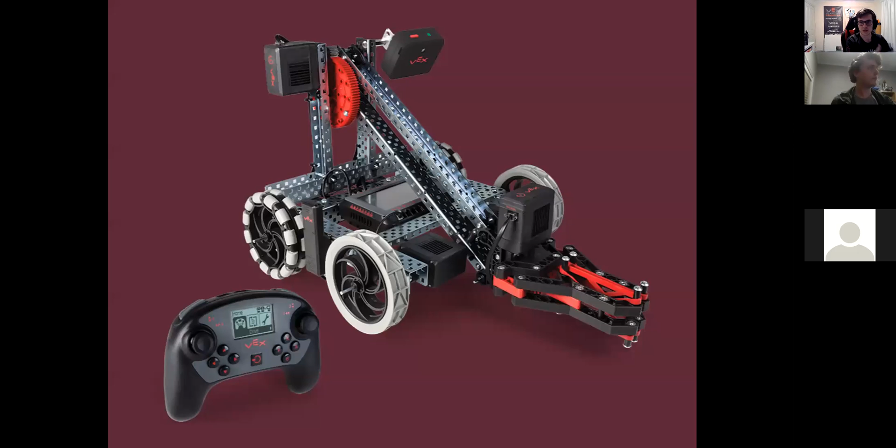So for parts, mechanical systems, and applications, we're going to talk about the Vex system and Clawbots and how we use the Kaizen model. More specifically, it's a model myself and Anthony use, which is all about continual improvement and getting from robots that look like this, that aren't particularly great, into more advanced robots that you would see at Worlds, on the world stage in the Dome.

So I guess we just want to start off with the Vex website. There's the Vex store, and there's a lot of different parts available on the store, a huge range of equipment you can buy. So over the next few slides, we've condensed some of the parts that we think are the most important and that you will see the most, and also a few unique applications, with a small discussion on each of these part categories to go over what they can be used for.

And then later on, we're going to talk about how these are all used together to make mechanical systems, like different drivetrains, different shooting mechanisms, intakes, and various other things that you will use in the competition.

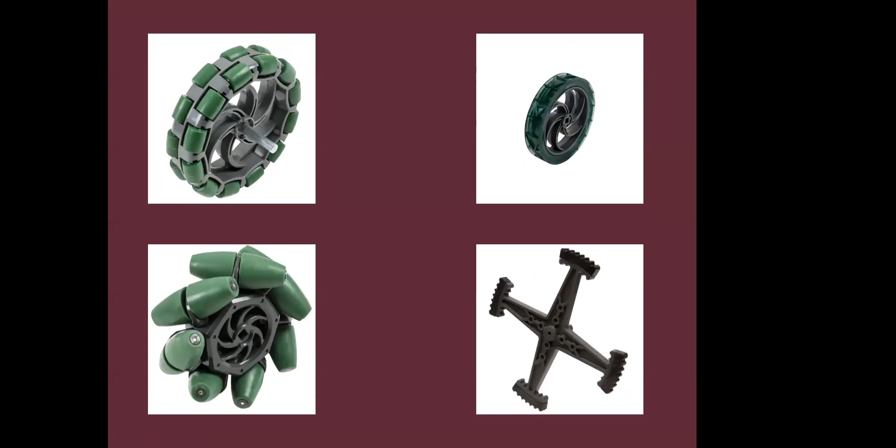Okay, so in the store, the first section of parts we're going to go over are the wheels. Vex offers a huge range of wheels in different sizes, typically 4-inch, 3.25-inch, and 2.75-inch. I'll hand it off to Jacob and Anthony to talk about how these wheels might be used.

I'll take the Omni wheels first. Generally every team should be using Omni wheels purely because of the low coefficient of friction. Just a clarification for anyone who doesn't know, Omni wheels are the top left one, the one with the miniature rollers. The main reason people would use this more is that because they roll side to side, they allow for very sharp turns compared to a normal traction wheel on the top right.

Think about how a tank can run both sides of its drive sideways and turn around, but your car cannot turn on the spot at all. It's sort of like reducing the friction sideways, because the wheels have to drag sideways as you turn on the spot, so the rollers can roll and it can turn better. Think of it like a robot that can rotate on its center axis, instead of one that can only turn at a 90-degree angle from its rear to its front.

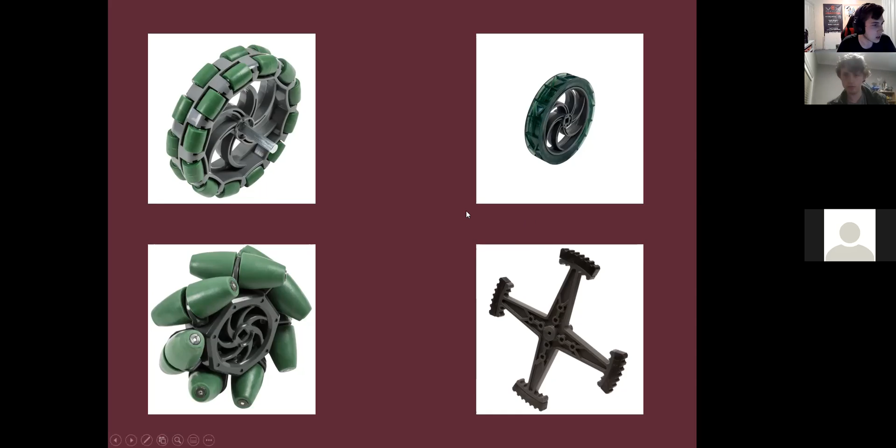Because it's kind of very top heavy, sometimes the robot would tip over and fall backwards. When falling backwards, it would land on these wheels so that even though the robot had fallen and might not be able to use its lift, it could still drive and act as a push bot. If you imagine it's tipped over, the front two wheels are at the top still spinning, but it's using the rollers from those wheels, so it's still able to drive around. That's a cool little tip. It'd be amazing to see that at competition - it's just a useful little competitive application.

An alternative to that is designing your robot to not tip over. That would also just get good, really.

And then we've got linear slides here. These are used for various different things. Generally, many teams wouldn't use this, rather opting to make their own. But the main purpose for this, predominantly in one season of VEX Robotics, was in Turning Point, where they used these components just to make a puncher, and that's really what it was. That's something we'll go into more depth with a bit later.

The reason a lot of teams don't use the VEX linear slides is they just have quite high friction in them. The old ones were steel on steel, and the new ones are plastic on steel, but it's just not designed the best. When you make your own custom ones, you'd probably use rollers to reduce friction, whereas this is just straight sliding on sliding action.

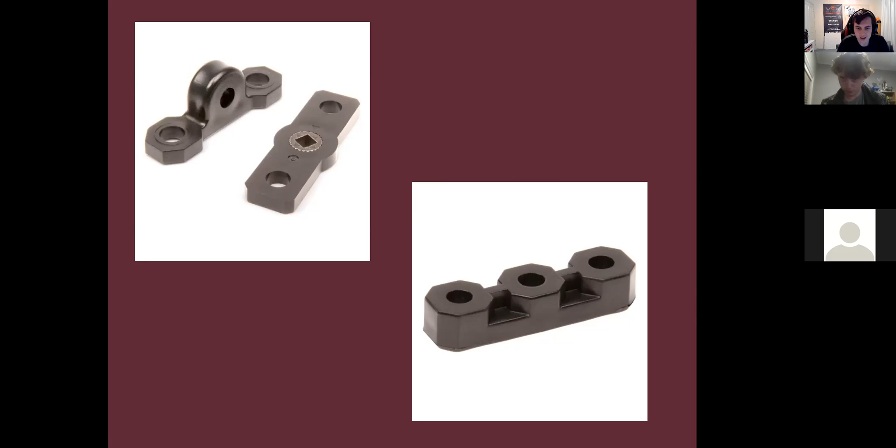Tank treads and sprockets, a quick jump into those. In VEX we have two types of sprockets, and we're not going to go over standard sprockets here, but they come in two sizes: standard sprockets and high strength sprockets. Standard sprockets have such small chain that it snaps way too easily, so no one in a competitive environment considers it. What you see here is high strength sprockets and high strength chain. You can interchange the chain with tank treads to make tank drives or conveyor belts or whatever.

There are multiple types of tank treads. On the top left, you've got ones you can slide padded mats or flaps into, which allow you to make flap-style intakes and whatnot. Or you can use green links, often used between padded links, like the one below the top left one, for tank drives. You don't see a lot of tank drives because the risk of them snapping is a big problem.

Was there anything else I was supposed to go over here? When you're using sprockets, you should use the largest sprocket you can fit without sacrificing other parts of your design, because you want to keep the wrap angle around it as large as possible to reduce strain. Using the small 6-tooth sprockets at the bottom right, you put a lot of strain on the chain if you try to power it via that, and it will likely snap.

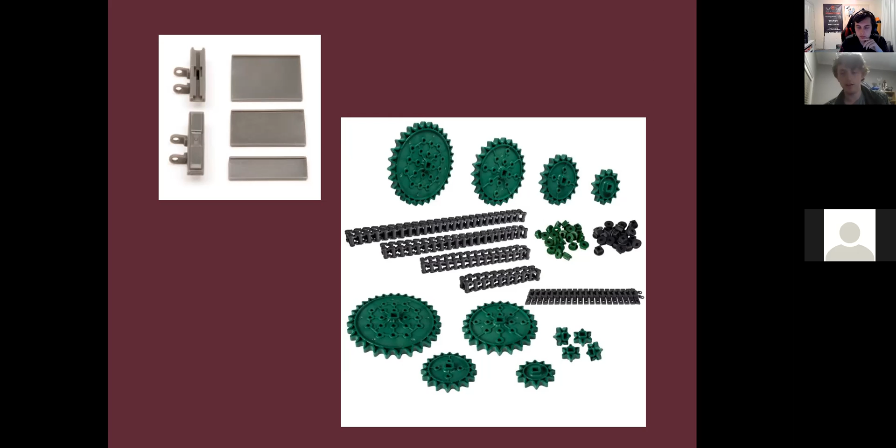All right, next thing we've got is just gears. Gears come in both low strength and high strength varieties. Typically the high strength ones are used much more—it's in the name that they've got more strength. Did you guys want to quickly go over gears?

A good rule of thumb: if you notice, there are very thin gears, and on the other side there are much thicker gears. You would generally want to use these thicker gears on more strenuous portions of your robot, like the drive or any lifting mechanisms. For the thinner gears, you'd want to use them for low friction purposes, like a flywheel or intakes—other low strength applications. The low strength ones are fine in a lot of applications.

The issue you see with them is Vex designs them with lines cut into them that work as fracture stress concentrators, so it's a lot easier to snap through those. You can snap teeth off in some situations, but with low strength gears, I've personally snapped the inside of the gear more than the teeth. I have snapped teeth off of high strength gears in very high stress situations, such as on a catapult that's having high impact repeatedly.

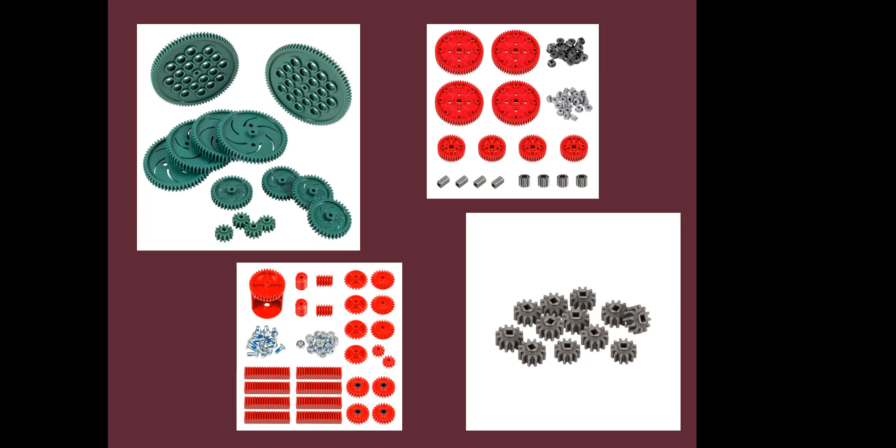But generally, as long as you ensure you're not overloading the gears and not doing repeated impact loading, they should be fine. If your drive reverses a lot - you're driving forward and suddenly want to go backwards without letting it roll to a stop - that's a high hammer load on the gears, which is why low strength gears sometimes won't handle a drive as well, especially with more motors.

Like that robot I've snapped the most on had 8 of the old motors, which is probably close to the force of a 6-motor drive. They say theoretically that should be a 4-motor drive on V5, but I think the loading was more like a 6-motor drive running through those gears. So if you use them in a drive, it's probably best to have high strength on the wheels themselves, where the most load will be running through.

And just to add onto what these guys have said, another cool application for the gears is that you don't necessarily just use them as gears. You can use them as gear ratios to change the torque or speed of different outputs. For instance, we had a gear ratio on our flywheel a couple years ago, which increased the speed of the flywheel using the gear ratio, right Anthony? Yeah, it was a 1:5 ratio and the input was a 600 RPM cartridge.

Yeah, so there's also ways you can increase the torque. Like if you want to climb onto a platform, you can use the gear ratio to increase the amount of torque you have in the wheels rather than the speed. So there's a lot of ways you can use gears to change the output of motors and also affect how motion works with the robot. Overall, they're really important.

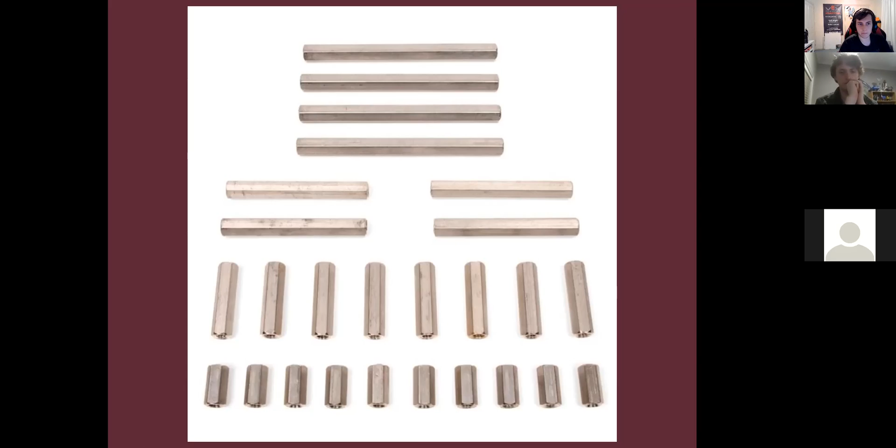Next up, we've got the Winch Pulley Kit, which isn't used that often by a lot of teams. I'd say, Jacob, have you ever used a Winch Pulley Kit? I don't even think we have one. Yeah, we have custom winches every time we want a winch.

People don't usually use winches and pulleys. They might buy the kit to use the pulleys for tensioning, for instance, which is what we did. Another application for these was that those pulleys were also good to use as rollers, to roll against the surface of the walls, as using other methods would have been too bulky or too small. So this was a nice in-between method for rolling against the surface.

I'm pretty sure we had them on the corners of our robots so that when it would bump in, it would kind of just self-center. Do you have anything to add, Jacob, or is that it?

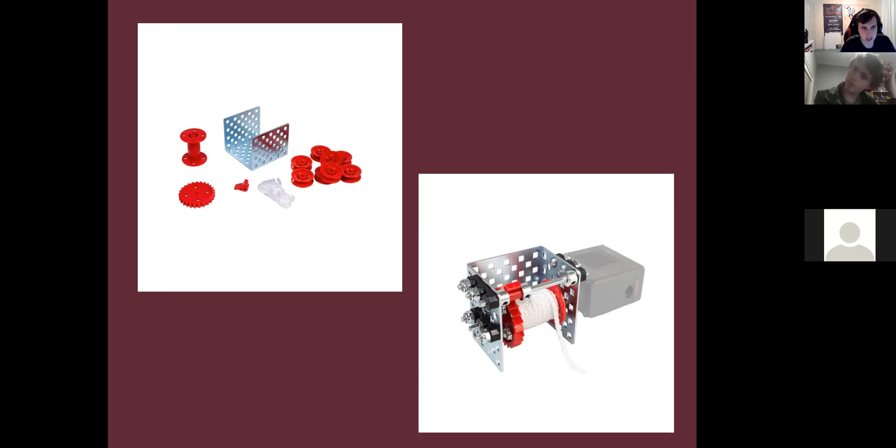Next up, we've got pneumatics, which teams have kind of overlooked the last few years with V5, because there used to be a restraint where you could only use your 8 V5 motors and couldn't use any pneumatics. But now they've changed it — you could sacrifice 2 motors to have pneumatics, which pretty much every team felt wasn't worth doing because the V5 motors are much better and could achieve what the pneumatics do. But now we have 8 motors plus pneumatics, so you don't have to sacrifice them anymore. So it's like if you had an additional function you wanted to do but didn't have enough motors for it, that's something you could use the pneumatics for.

One example of something we did was during Turning Point, back when we had V4, I think we could afford to do it then. What we did was we had the pneumatics at the bottom of our robot, with 2 cylinders, so that when we'd go on the platform to park, we'd activate the pneumatics and they'd push down these little paddings, which would lift the robot up a bit. It had anti-slip mat, so since we had Omni wheels, when teams would try to push us off the platform, we'd be stuck to it, giving us more traction and making it harder for teams to push us. So there's little applications like that you can use them for.

What are some more? If you don't know what pneumatics are, they're air-powered pistons, so just linear movement. You pump up a tank with a bike pump and can fire it however many times you want in a match until it runs out of air. There are different pneumatic kits as well — single acting, double acting — so there's a huge range of different ones you can use, and it's really fun to play around with.

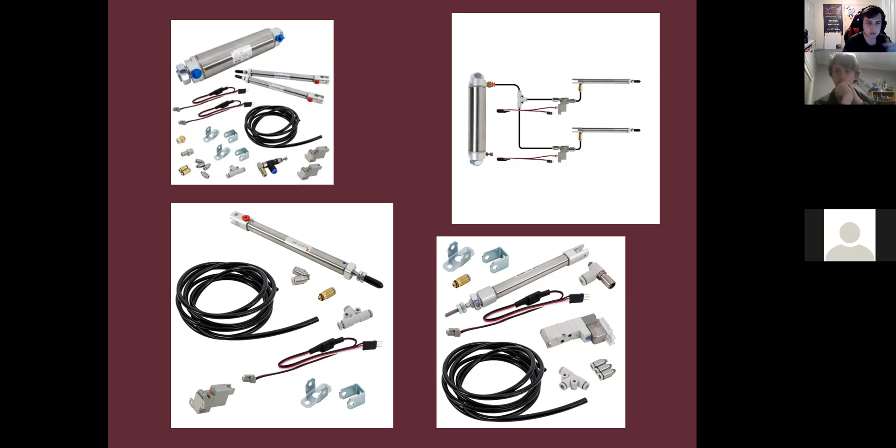do with it. But these are kind of the parts we'd say are really important to use, and also just to get you thinking about different applications you might have for using these. And also so that when we now show you the systems we're going to get into, you guys have an understanding of what these are.

So we've got a couple of videos today. Only one of them is a bit of an explanation video. And yeah, so we're starting off with our drive systems. So we're going to talk about drivetrains. We have this quick, I think it's a 3-minute video. It just goes over all the different drive systems. I feel like it'll probably explain it better than we will. But then we're going to do our own little explanation afterwards and go into a bit more detail. So I hope you guys enjoy this video.

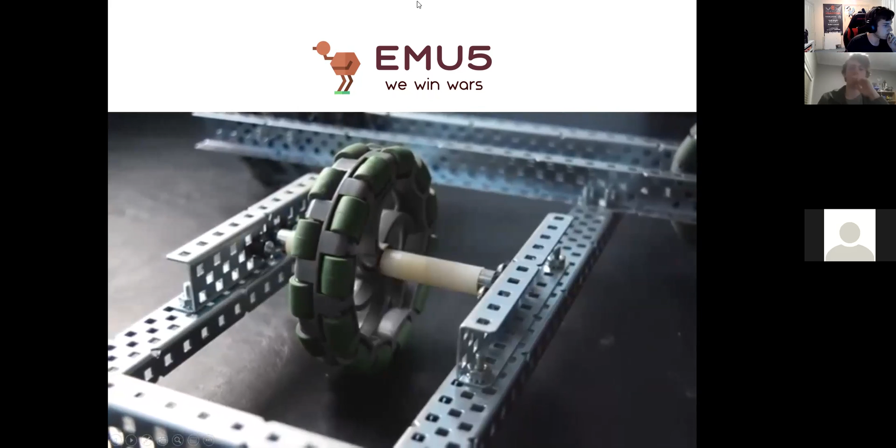So yeah. Vex Robotics has a number of different wheel types, but what's the big deal with Omni wheels? What advantages do they give you?

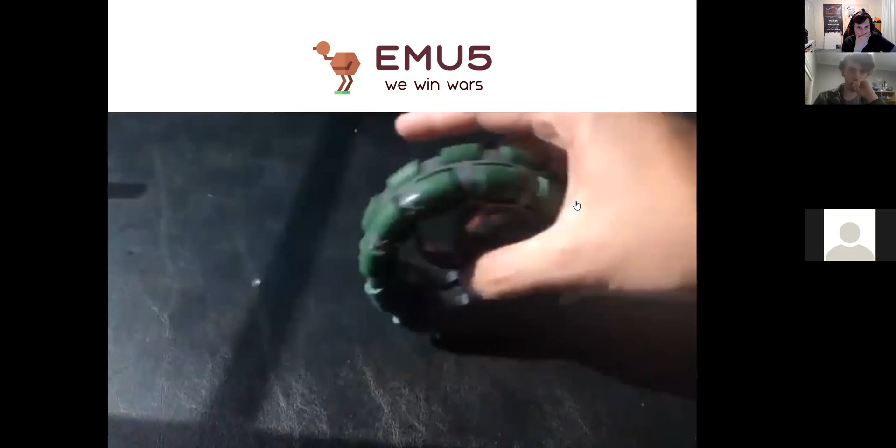Omni wheels have rollers all along the circumference, which allows them to not only roll like a normal wheel, but also move sideways, allowing you to do some cool things. The most common type of Omni wheel configuration is the tank drive. This configuration is your standard 4-wheel setup, which can move back and forth and also be pushed from the side. This can be a disadvantage, but it allows the wheels to pivot more effectively, putting less strain on the motors. This was a big deal back in the Cortex days, but with V5 motors it probably isn't that big of

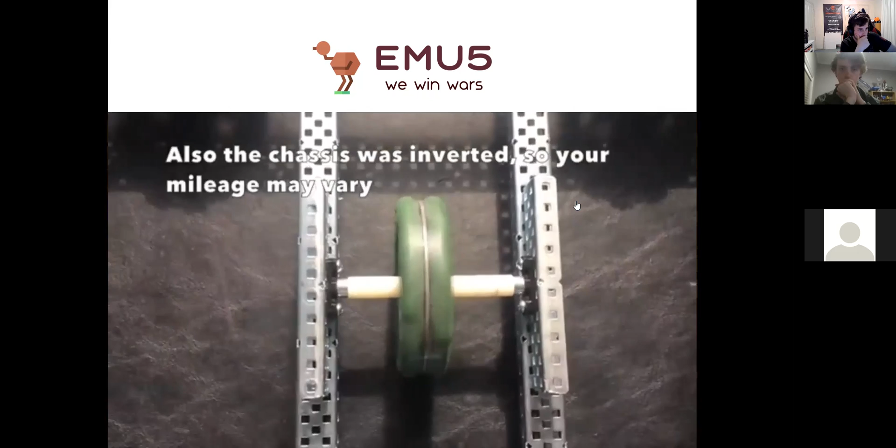a deal. One thing that takes up another motor but could potentially be a worthwhile addition is a 5th wheel in the horizontal direction. This can help you strafe sideways, allowing you to line up shots and shoot with more precision. You may have to create some sort of system that keeps the wheel in contact with the ground, because this wheel sometimes worked but wasn't in contact with the ground as much as it should have been, which means that if there was a lot of weight on the robot it probably wouldn't work at all. This setup takes some effort but could potentially yield some neat advantages.

One other tank drive configuration is the hybrid setup. This setup involves swapping one pair of Omni wheels for normal wheels, therefore getting the decreased strain on the motors because one set can slide effortlessly across the floor, and you are much more protected against pushing compared to the full Omni wheel setup. This setup has perhaps the best pro to con ratio, with the only main con being that you can't use a middle wheel to strafe, but that's a small price to pay for not being pushed

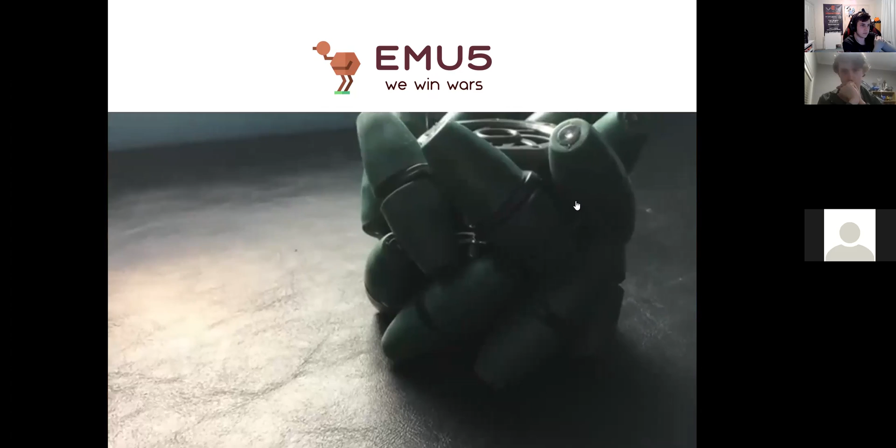around. For the next wheel type, we'll be moving on to Mecanum wheels, which simply look awesome. They feature angled rollers and come in 2 counter-rotational flavors. Mecanum wheels are used on industrial machines such as forklifts because they allow you to strafe sideways, keeping your front end pointed towards the target, which allows you to line yourself up with more precision than a standard tank drive.

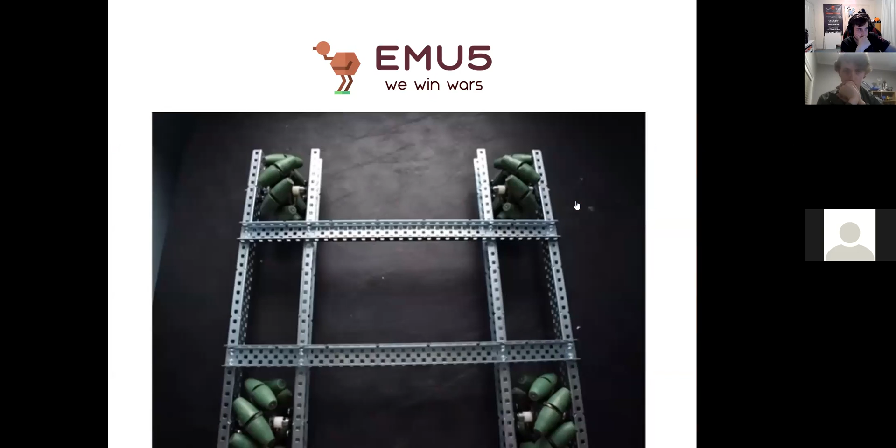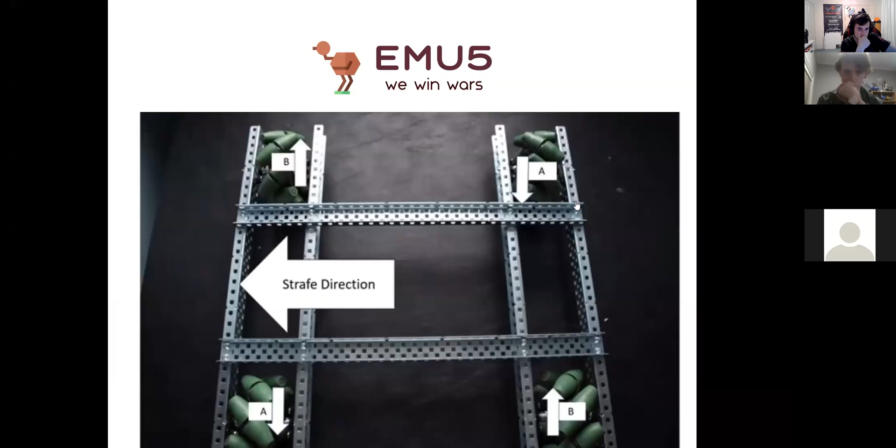With Mecanum wheels, you want to set each pair at opposite corners so that your front 2 wheels are either pointing towards or away from each other, and the opposite for the back wheels. Let's call these 2 wheels the A wheels and these 2 wheels the B wheels. When you turn the A wheels forward and the B wheels in reverse, you strafe to the right. When you turn the A wheels in reverse and the B wheels forward, you strafe to the left. You can still drive forward and backward like a normal tank drive, along with turning in place.

But disadvantages? Not a lot. From what I could find, the main disadvantages are that they have less traction because they're giving up surface area for the rollers. Mecanum wheels also typically weigh more than traditional or Omni wheels due to the increased width. Mecanum wheels are pretty cool and fun, they just require a couple of minor trade-offs.

Finally, we come to the lord of all Omni wheel setups, the holonomic drive, commonly referred to as the X drive. This setup features 4 Omni wheels arranged at right angles to each other. The example shown here is nowhere close to the size restrictions of VRC and isn't a particularly secure example, but was mocked up rather quickly to show the range of motion for one of these setups.

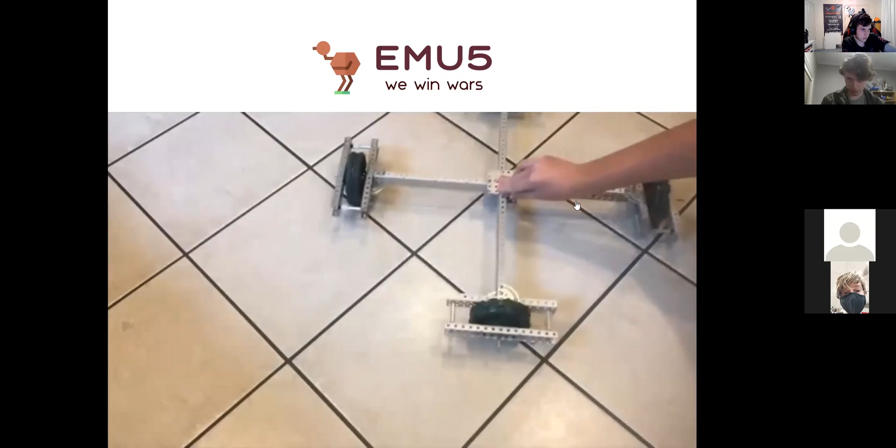This drive setup is really cool because it allows for 8 directional movement, allowing movement in the 4 main directions along with the diagonals. If we name each wheel A, B, C, and D, we can go through and dissect how to make this system drive in all 8 directions. If we move wheels A and B toward the middle, and wheels C and D toward the outside, we move forward. If we extrapolate this to the other 3 main directions, we can see how to drive each set of wheels. Feel free to pause the video to see in more detail.

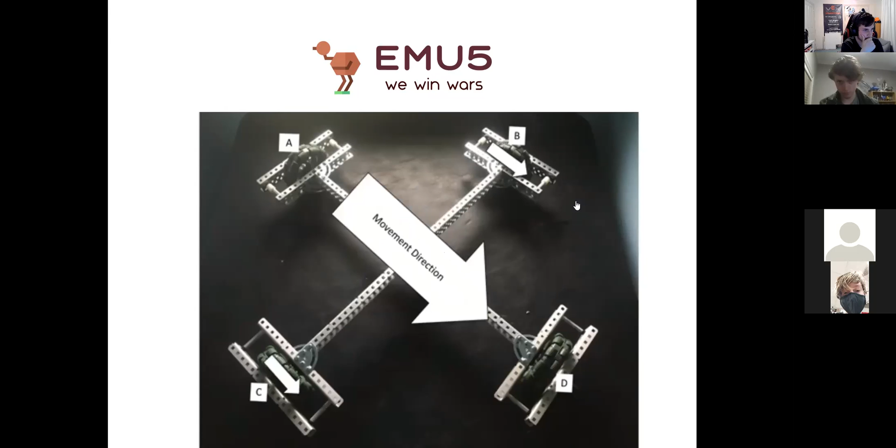If we want to move diagonally right forwards, we move wheels A and D in that direction. If we move them in reverse, we move diagonally left backwards. Moving wheels B and C forward, we move diagonally left forwards, and by reversing B and C, we move diagonally right backwards. And you can turn in a circle by moving all the wheels in the same direction.

You might be saying, well, if it's so good, then why doesn't everyone do it? Well, from what I could find, the main downsides are less pushing power and less traction, which means that for some years, like In the Zone, where pushing mobile goals was a major part of the game, this would be a pretty big disadvantage, but in shooting and stacking games, Turning Point, this drivetrain could be a huge point in your favor. Climbing over objects isn't the best, especially with the outer wheel guards, but if you could sacrifice those, I think that climbing might not be that big of a deal, especially if your drive is geared for torque.

There's also a 3-wheeled holonomic drive, which is outlined in the excellent book RioBotz Combat Robot Tutorial, where it outlines 3 wheels set at 120 degrees from each other. However, this is difficult to make in Vex, seeing as there aren't gussets with that angle, and I wasn't sure how useful this knowledge would be in the Vex competition world.

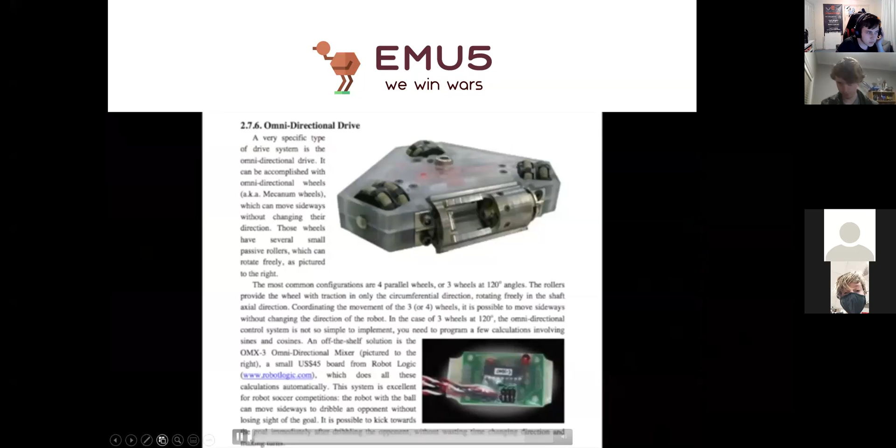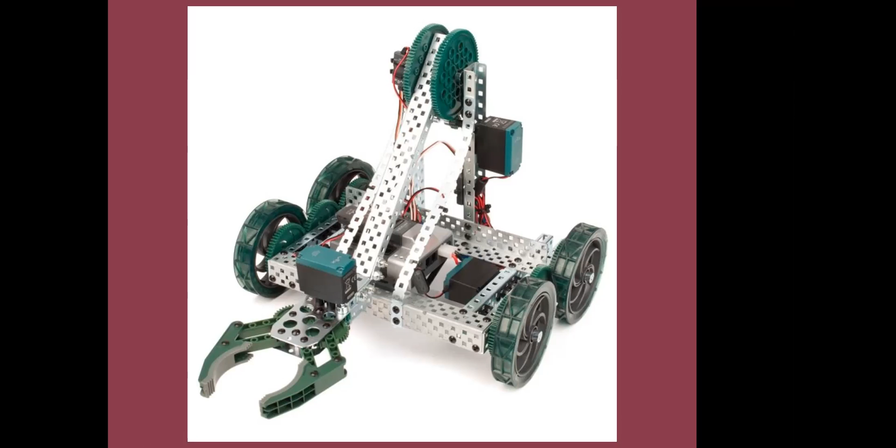The axle will want to bend further and faster, which will damage your axle and cause the wheel to not be sitting straight. Whereas if you support it on both sides, you're reducing the distance. You're giving it more support. It's less likely to bend. Additionally, if you're bending your axle on the outside, it will likely bend the axle on the other side a bit easier, and your gear might become disconnected from other gears it's linked to and skip a fair bit because of the bent axle.

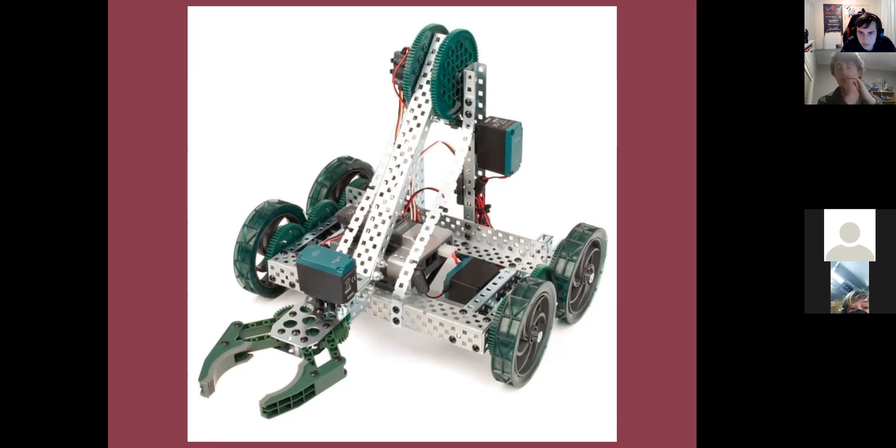Yeah. Okay. And then next up, we've got Mecanum. Now, Mecanum, in my opinion, back when I first started, when I was in year 8 and year 9, I was like, oh, look at it, Mecanum drive, that's so cool. You can do holonomic without an extra motor like an H drive, and we didn't have to build an X drive, you just use these wheels. But there are a lot of downsides to it. So did you guys want to explain why Mecanum isn't as good as you might think initially?

Primarily, the main reason why a lot of people try to avoid using these types of wheels is because, as you can see from the demonstration, these wheels consume a lot of space on your robot. If you use a conventional Omni wheel, it could take up 4 holes, just count the holes. Or if you want to take it to the extreme, it could take up 3 holes. And the advantage that gives you is more real estate within the center to add features you want on your robot, little mechanisms inside your robot, or just more room for your battery and brain.

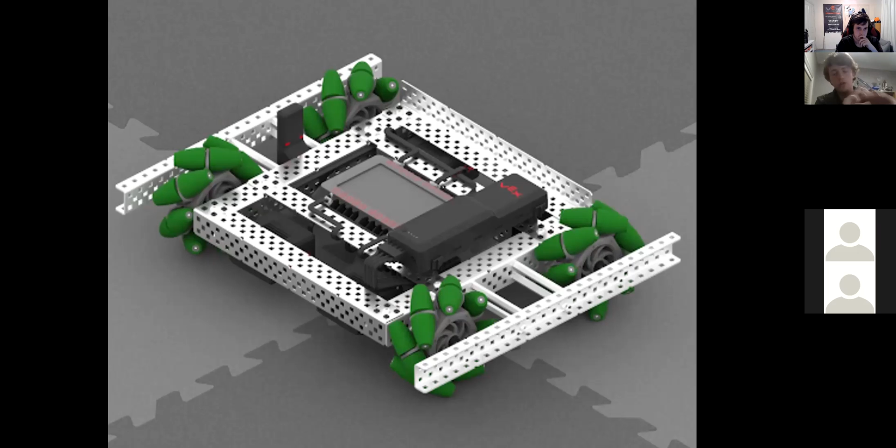In terms of friction and all that, Jacob, was there anything you wanted to add? They have higher friction, but another issue is this requires you to commit to either a 4-motor or an 8-motor drive, because you can't link the 2 wheels on the same side of the drive together, because they need to be able to rotate in opposite directions. Whereas with a tank drive, you'll often link your front and back wheel together, so they're all driven by the same motors. What that means is, if one of the wheels is not touching the ground, the other wheel's getting the power from all the motors on that side to push it forward.

Whereas if one of those wheels gets lifted off and you want to drive forward, you've just lost one of your drive motors from pushing. You've only got your back wheel pushing, not your front wheel, which will reduce your effectiveness there. Yep. I couldn't find any really good examples of Mecanum drives. This kind of proves that they're not used that competitively. But here's a robot that does have Mecanum wheels. As I said, I couldn't even get a really good picture because it's just not used that often.

X drives. So here's just a little CAD image of an X drive, and here is a top view.

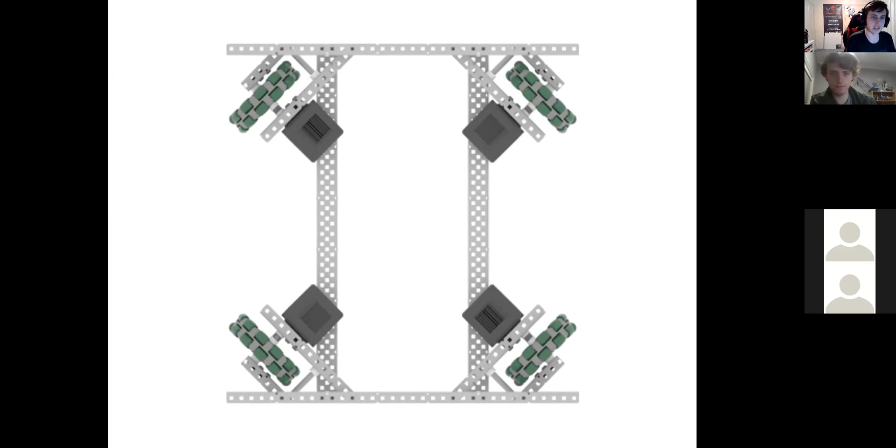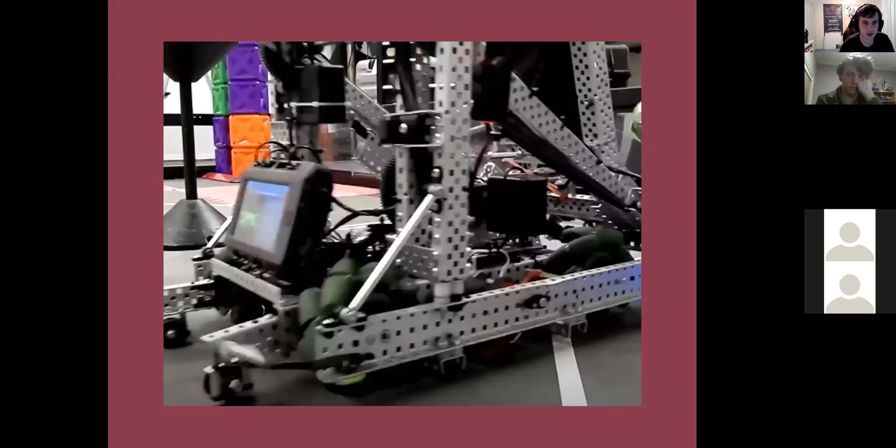X drives typically take up a lot of space. One thing about Vex is you always have some sort of manipulator, an object that manipulates game elements, like an intake or a shooter. Those are considered manipulating mechanisms. With X drives, because they take up so much space to build, there isn't much room to attach these manipulators easily within the chassis. Whereas with a tank drive, you can hollow out the middle and fit everything else in, so there's more internal room compared to an X drive.

Myself and Anthony built an X drive two years ago for Turning Point. Here's a picture of the bottom of it. We tried to maximize the space inside by minimizing the bracing in the middle, but even then we still struggled a lot with it. We only used this X drive for one competition, the season opener that year. I personally really liked it.

The problem with X drives is that unless it's built perfectly and the friction is perfect, it's always going to be a bit problematic. One of our wheels had slightly more friction than the others, so instead of moving and strafing perfectly, it would always turn on a bit of an angle. It was always harder for the driver because they'd have to adjust for this slight deviation. There are small things like that to keep in mind with X drives. There's a high skill cap, and also a lot of downsides.

Did you want to go over the downsides, Jacob? Back to the mechanisms — you can't link your drive sides together, so every motor is independent, and if a wheel gets off the ground, you're not getting that power.

This isn't very intuitive, but an X drive will have a faster drive speed than the same ratio on the same wheels in a tank drive formation. Because of how the vectors add up, you end up getting 1.4 times the speed, or the drive times root 2, which also means you've got 1 over root 2 times the torque — so less torque. People think their X drive isn't as strong as their tank drive because they don't realize it's getting lower torque for going faster on the same ratio. And if you don't build it right, it doesn't work very well.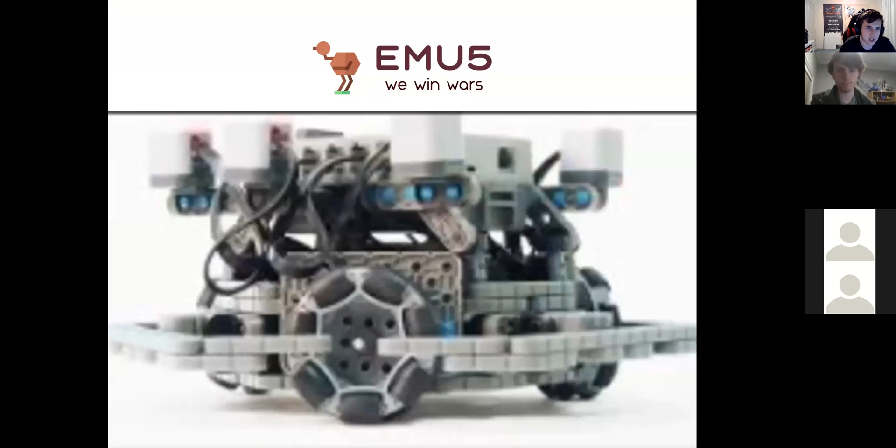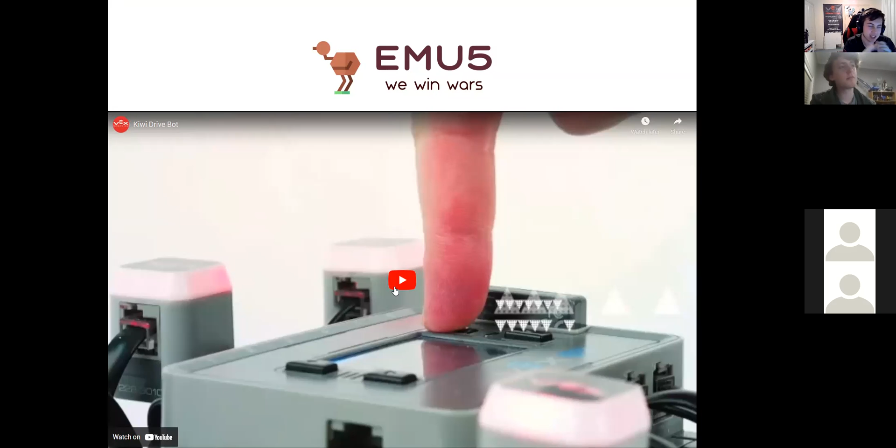Lastly, we'll quickly go over the last drivetrain, the Kiwi drive. Let's watch this little video, it's a quick short one. Kiwi drives are not used competitively — I don't know any Vex team that's actually built a Kiwi drive in VRC and used it successfully. It's basically an X drive, but worse. Let's just watch it.

It's literally a bit of a meme. I couldn't even find a VRC video of a robot that has Kiwi Drive. It's really hard to build, and the downsides far outweigh the advantages of it.

You only have 2 of the wheels powering at any time if you're driving in a straight line. It does mean you can use fewer motors on the drive, but often in competitive Vex you need at least 4 motors on the drive to have enough torque to do things like climb the platform this season, or if someone's pushing you. If you have a 2-motor drive, you can't handle pushing back. You need at least 4.

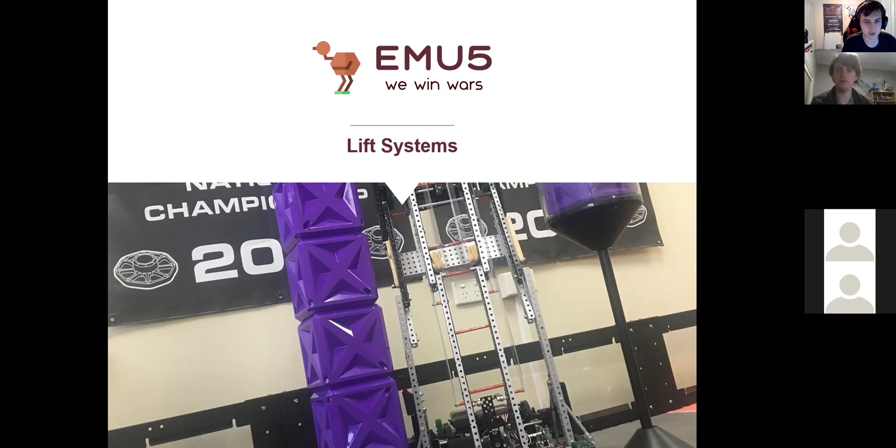Okay, so lift systems. The famous double reverse 4-bar, or as Jacob refers to it, the reverse double 4-bar. There's a lot of arguments about whether it's a DR4B or an RD4B. That's a single 4-bar, Spencer. Oh, this is a single 4-bar. I'm sorry, we're gonna get to double reverse 4-bar. Spencer cancelled, he doesn't know his stuff. Fake Vex, I got confused. Fake Vex team.

All right, this is a single 4-bar. They're very easy to build, reliable, and don't require much maintenance. So the end of the lift, as you can see in this picture, stays parallel. Maybe I'll let you guys explain it. You guys are builders, I'm not.

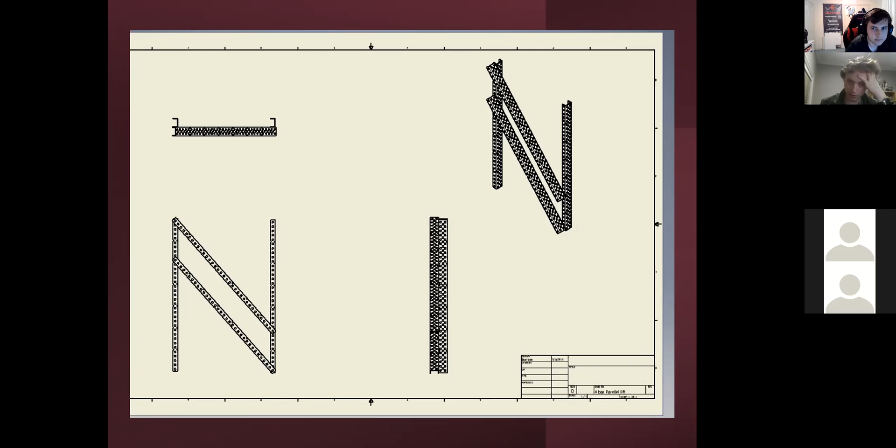Do you guys want to explain a 4-bar? When you look at lifts, you include the tower they're attached to as a bar. If you look at the bottom left, you can see there are 4 bars involved. If you power one of those bars, the ones on an angle, it will rotate like a simple arm. Because of the way it's linked with the right number of holes between them on both ends, the bar at the end will stay the same orientation the whole rotation around. You can build it with different hole spacings to have a non-parallel 4-bar, but that's a bit more advanced than we'll cover here.

The advantage is if you have something that must remain exactly straight as it goes up. The disadvantage is the lift moves forward as it goes up and then comes back - it moves in an arc. So everything will be getting away and getting closer. It's not good for placing on a fine line in a specific spot as you get up to a different height.

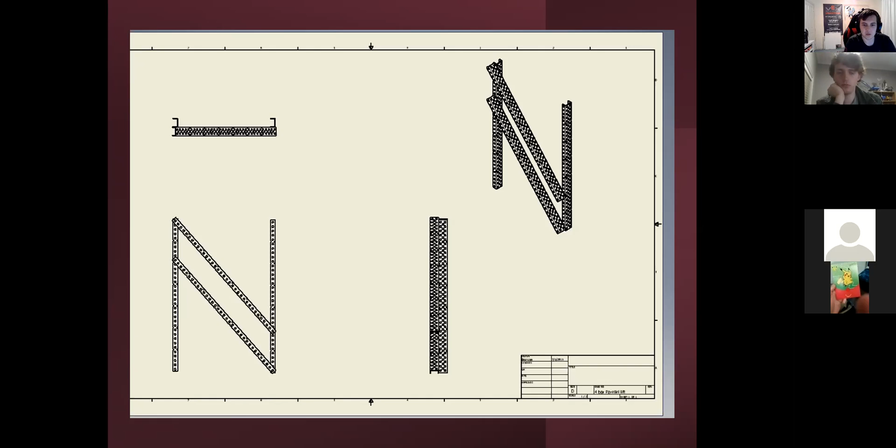As I said before, DR4Bs and RD4Bs are the next thing. That's where you combine 2 different 4-bars together. This is a DR4B. As you can see, it has one 4-bar in one direction and one in the other, so it's reverse, and includes 2 iterations of a 4-bar. It's a relatively linear lift compared to single stage lifts, and if built properly, they can reach heights that a single stage wouldn't be able to. You can replace the second iteration of the 4-bar with a 6-bar if you want to increase the height a little bit. These are harder to build than a normal 4-bar, and they are a little bit more difficult to code.

And they are prone to more issues as well when they're not built properly. So they are heavier, they require more space.

Do you guys have anything to add? The main advantage why people would want to use this is that the main side you're trying to lift up will move in a linear pattern. It doesn't move in an arc. In a perfect world, both the lower and upper arms will be moving at the exact same movement, so it will just require the top arms to move in a straight line.

That's the whole point of moving in an arc. The middle stage moves in an arc, and then the top stage moves in an arc, but that arc is cancelled out by the arc at the bottom. As long as you've linked both stages together, the bottom stage rotates gears in the middle that then rotate the top arms. And why I say it's in a perfect world, sometimes it will move slightly in an arc, but that's generally negated because Vex is a very rough sport, and it's not going to be perfect 100% of the time. So you can get by on just a bit of error.

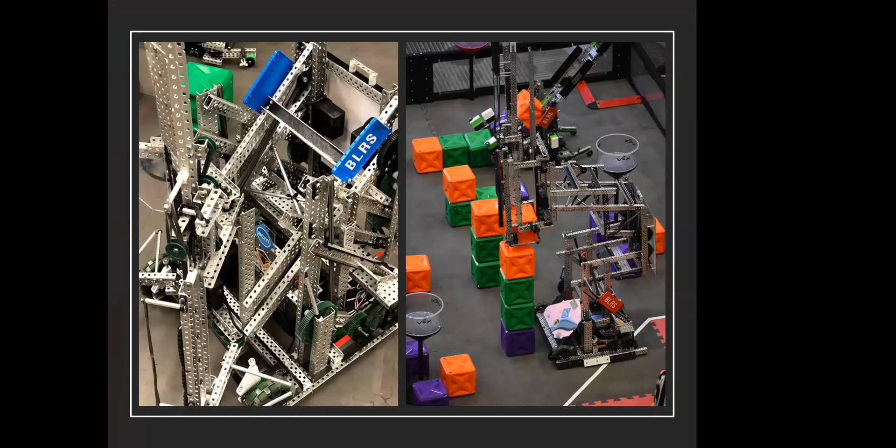Double reverse 4-bars are broken down into different categories. This is what we would consider a heavyweight. These are powered from the bottom and the middle. They have a very heavy top manipulator, as you can see in BLRS's robot here, with a lot of boxy channels - they're very tall. You can kind of tell by looking at it that it's a bit more built than maybe a smaller 4-bar, like a lightweight, which we'll show you now.

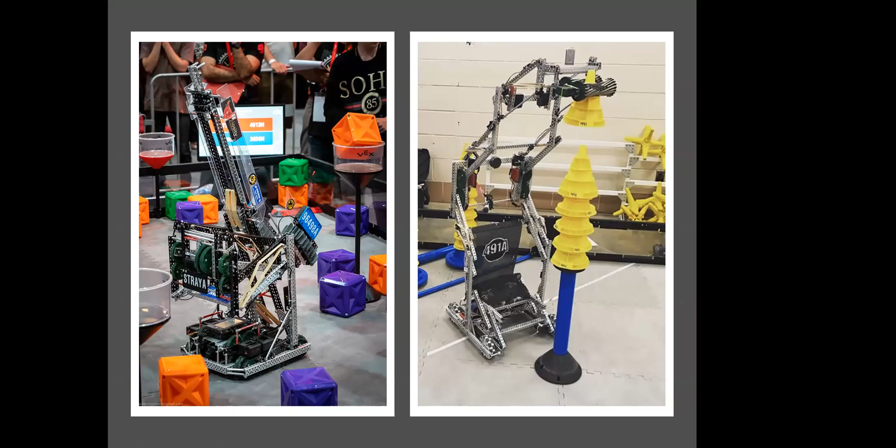These I would consider more all-around DR4Bs. They're a bit more reliable. They generally use 2 motors. They're quick, they're tall, they're easy to make, and they're powered in the middle. They have a lot of cross bracing, and they're pretty much structurally made up entirely of 2 wide C channels.

So the robot on the left here is me and Anthony's robot from Tower Takeover, a bit over a year ago. Ours I wouldn't say was that conventional in terms of an all-round - it kind of fits into this all-round middle kind of section. But ours only used 1 motor, so it just wasn't powered as much, but it's still classed, I guess, as an all-round. Then 491A on the right is a bit of a better example of all-around. It uses 2 motors, 2 V4 motors.

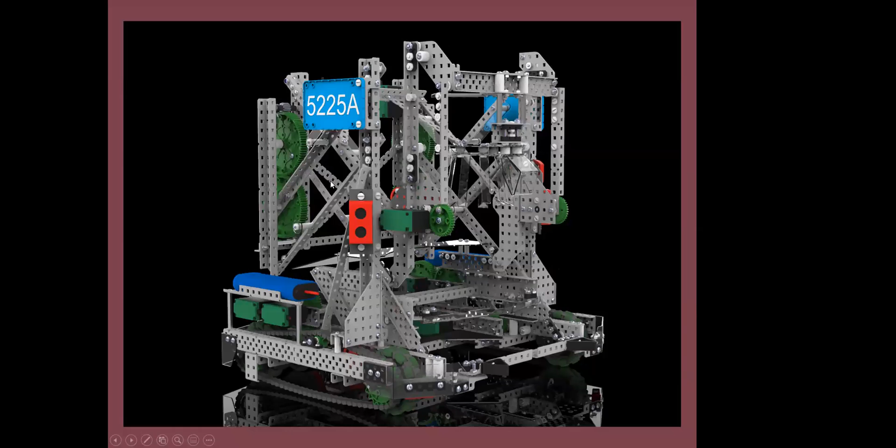Then we have this lightweight - this is the Pilons from Canada, 5225A. The DR4B, for instance, these are good options for motor efficiency and lighter game elements where you just need a lift for maybe a smaller kind of scoring element, like caps in Turning Point. You don't want to dedicate a lot of motors to that. So that's kind of the instance where you'd want to use a lightweight, I guess.

And then featherweights are even lighter, and they're just really, really simple, quick 4-bars. They just strip down the concept to the very basics. They're very space efficient, and they have another actuating device or lift on the end. I believe that kind of wraps it all up. I guess you guys would agree - yeah, just the difference.

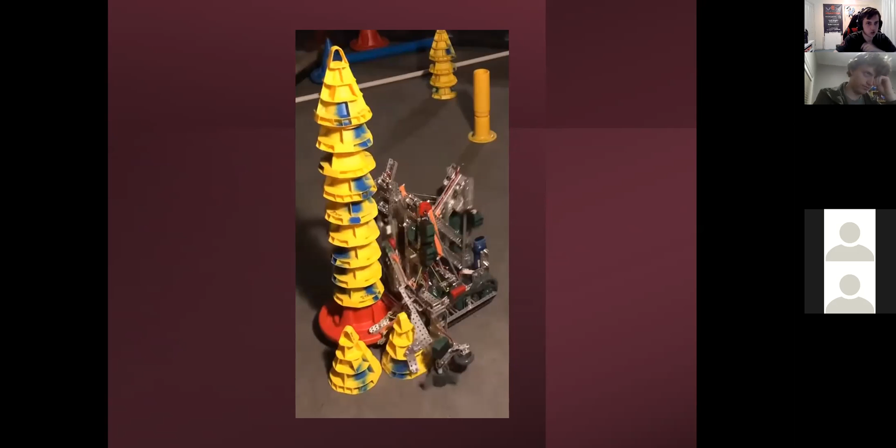I'm just going to try to speed through because I don't want to run too much over. There are some main components to success when building these lifts, and these can be broken down into planning, designing, robustness, and efficiency. Planning is just setting your constraints, knowing what you need to do. Designing, you could use CAD tools such as Autodesk, just to make sure everything's fitting in well and that it's robust. As a Vex team member, you have free license to Autodesk as a student.

So that's really useful, and I'd start playing around with that as well. Make sure they're very robust, with lots of bracing, and that it's really efficient. Did you guys want to add anything? I think what was the other one you mentioned before, Anthony - another component? Just reliability, really. You don't want a robot to just work instead of working reliably, because it could work one time and then not work the next time. So you want to constantly test for any weak points in any design of your robot.

Okay, and then we've got other lifts. So this is a scissor lift. If you can imagine, I'm sure you guys have seen them before in the city, where you have these little lifts that extend like that when people are standing at the top. Those are great real world examples of scissor lifts.

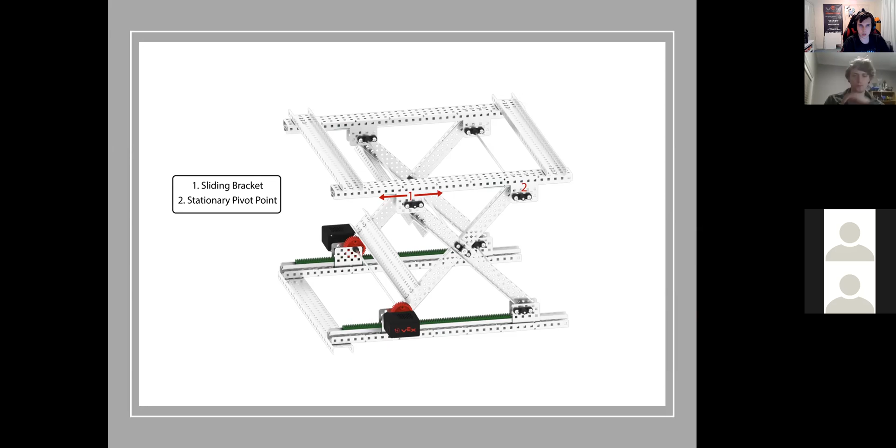And then just expanding on that, we have a little demonstration video here, which we'll quickly watch. We'll skip through it a little bit.

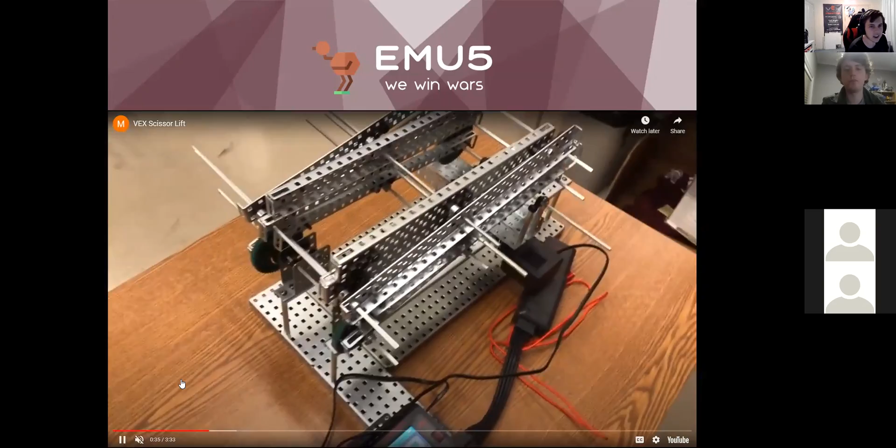All right, I think it probably starts around here. So pretty much the linear slides move out, and you can kind of imagine it like scissors. It gets closer at the bottom. Yeah, this one's built a bit lopsided, so it's not going linear completely up, but generally they would stay very central.

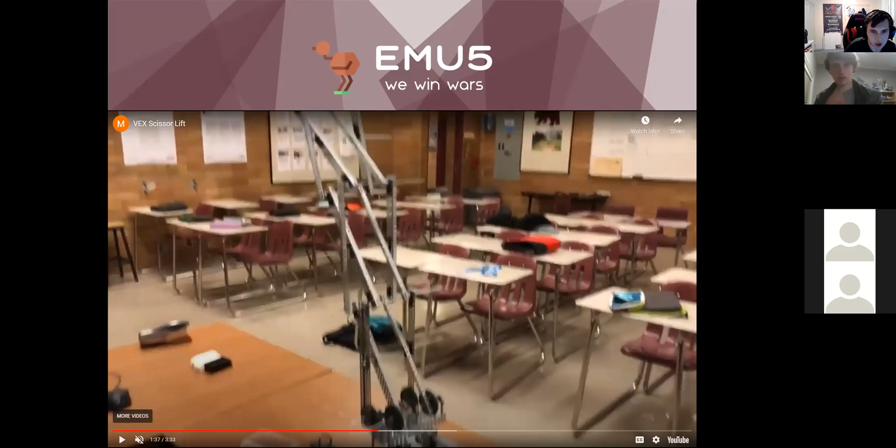More torque is necessary to lift to the full height, and they are front heavy because they're not moving directly up, so they're more likely to tip forward. They require a bit more horizontal space. Did you guys want to expand on the 6 bar at all? Not really, pretty self-explanatory.

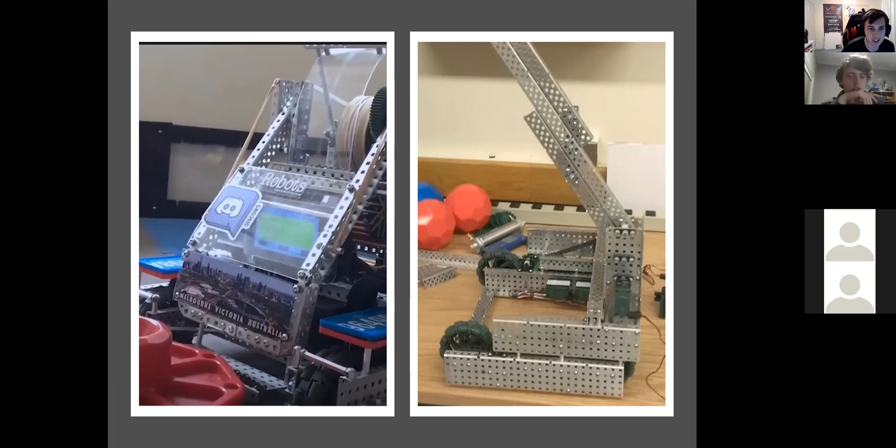The one on the left is myself and Anthony's robot from 2 years ago. This isn't a 6 bar, and it's not really considered a 2 bar either. It's more what we'd say is a simple arm. That's Jacob's definition of it. As demonstrated, it's kind of its own thing. You can just have an arm that lifts up. Fairly simple and easy to implement, you bolt a C channel to a gear and you're off, and it rotates.

The maintenance might be slightly harder as well, due to the chain tensioning, and there's also a chance the chain may break, so they're not used as often because of that high risk. The main benefit to a chain bar over a simple arm is that you will have the same orientation of the end through the whole rotation of the arm.

They're very, very easy to build, but they don't reach as high of a height as something like a 4 bar or a double reverse.

They're compact relative to other bar lifts, and the mounting point can easily be made as a flat surface. They are mechanically inefficient due to the surface contact, and they're relatively hard to build, with multiple stages.

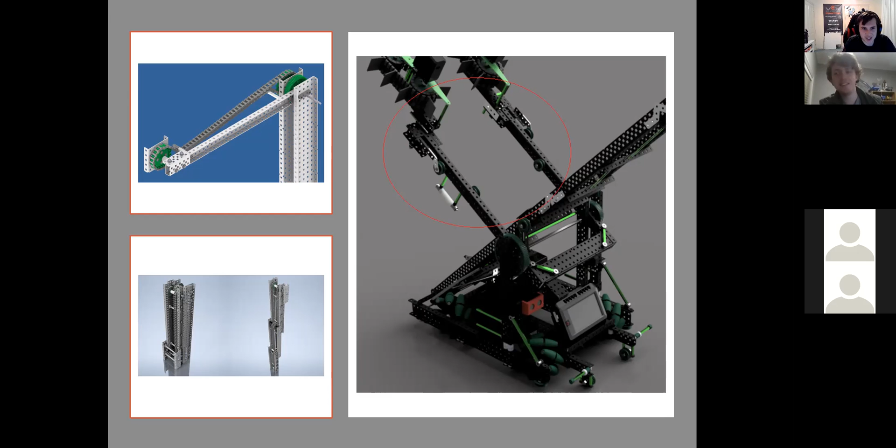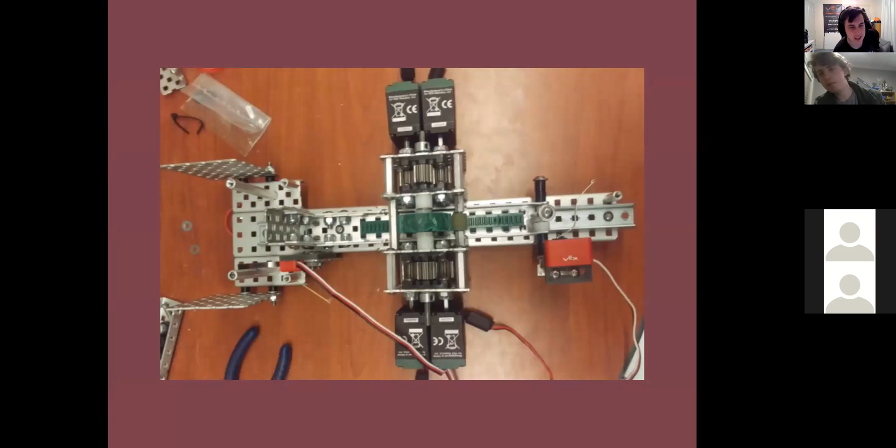That was pretty much that. Just as a statement, because people might not know how that was firing - the gear that's turning it is missing teeth. If you look closely, a bunch of the teeth have been shaved off, so the teeth pull it back, and then it reaches where no teeth are pulling the gears, and it shoots forward because the rubber bands are pulling it forward. You'll notice later when you see my catapult, that's how my catapult fires as well - it might be a bit harder to see there, so I thought I'd point it out here. Also, as you can see in this image a bit clearer at the very top, you can see the gear shaven.

I'll just add - this one here has a limit switch at the end, so that in the program it can detect when it's gone a certain distance back so that it can shoot.

They're very simple to build, and they are one of the most effective ball launching mechanisms. They're relatively compact, and it doesn't lose any energy to spin like flywheels do. It has a less violent firing action. Obviously there are some safety issues - you don't want to stick your finger in it, not a great idea, I wouldn't try that. But yeah, an example of a shooting mechanism that's very useful. Definitely would recommend using punchers.

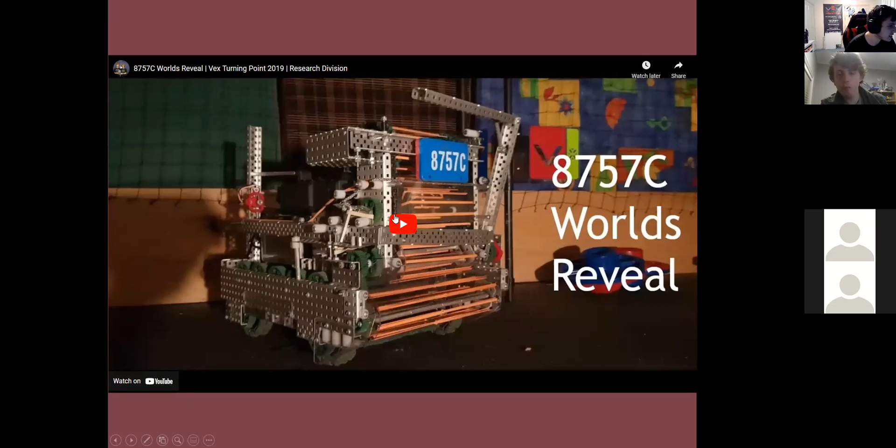Now onto catapults. We don't really have any images, but we're going to look at Jacob's video, and then maybe you can break down a couple things in your robot for us. We'll just do a little general thing. Do you want the audio, or do you want to talk over it? Mute it so I can talk.

First you'll notice my shaky hands when I try to record - yeah, I can't hold a camera still. But what you've got here is a little roller that's to pick balls up. The balls would go up the front of this robot with all these rubber band things rolling, so we can just drive into the ball and it's picked up.

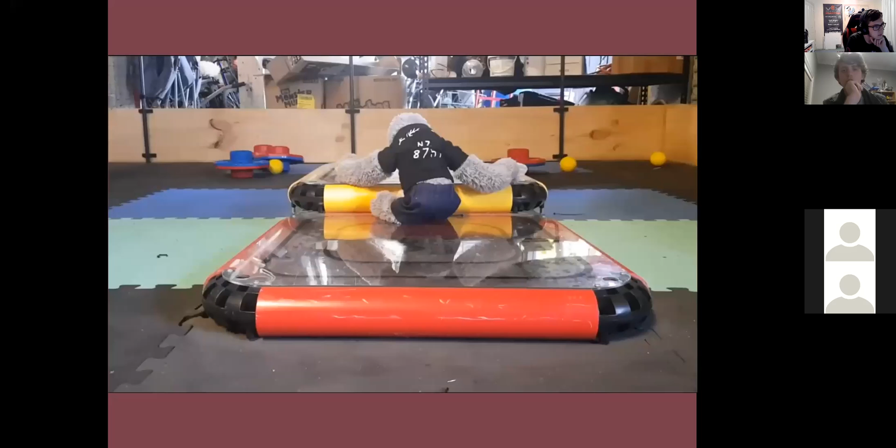We had a motor dedicated to flipping over those objects. Kind of waiting till we get to see the catapult - my catapult could shoot two balls at the same time and hit the targets from a range of different distances. That was specifically called a Hayukapult that season, because the person who came up with it was called Hayuk.

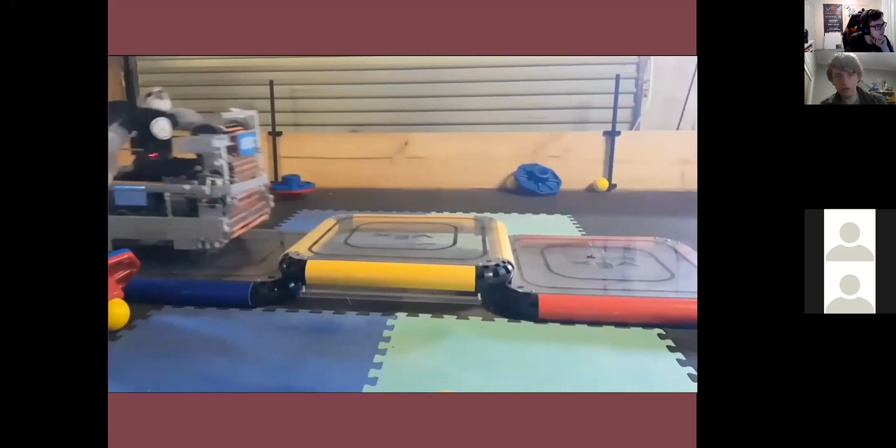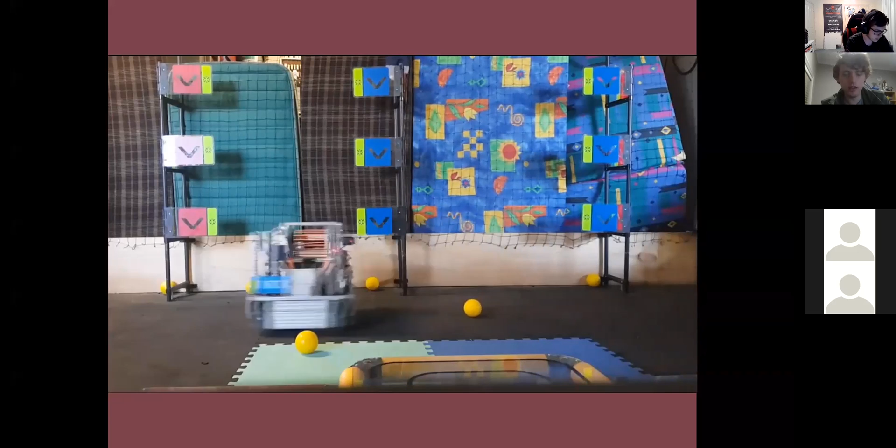So what we had is, there's our catapult and 2 balls sat on it. It allowed us to shoot them both at the same time, which we felt was the optimal way to play the game. There were people who used flywheels, but the speed of being able to hit 2 flags at the same time and just immediately have 2 more loaded in like that was quite alluring to us, along with how it's more hardware controlled rather than software controlled. With a puncher, you needed to have a mechanical change.

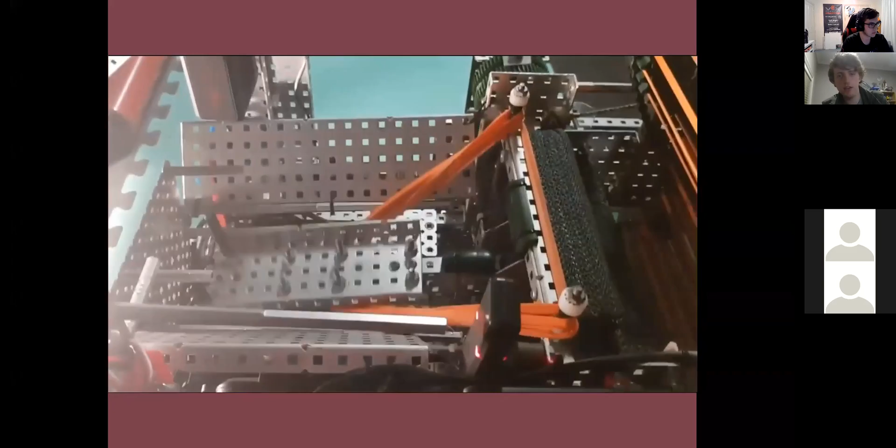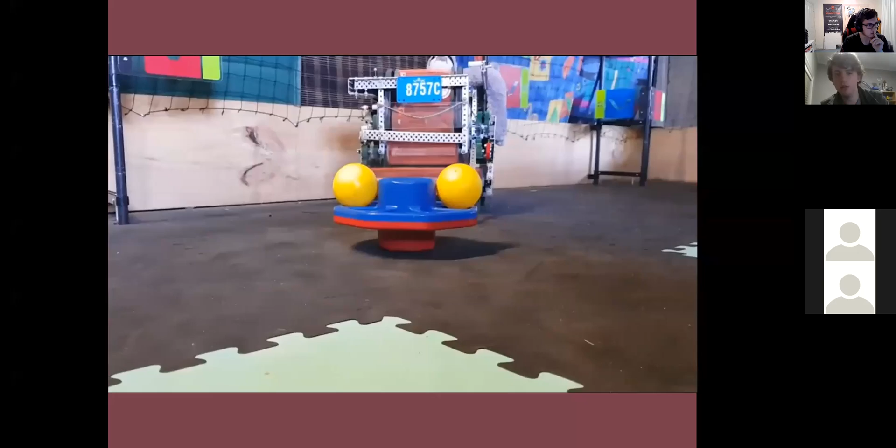And so there you see the catapult goes down, and that's from the same slip gear concept. Another feature of our robot is this ram here, which was passive. That didn't have a motor dedicated to it. We could just fire that out to ram people off that platform in the middle. What else is there to talk about for this robot? Yeah, I can't think of anything else that really needs.

Oh, there was that. Yeah, so not many people could drive straight up onto the platform. We had designed our bot so that our rollers would be able to grip the platform and give us enough force to lift our front wheels up so they can grip the platform and then can pull us up on top of the platform, which a lot of teams couldn't do.

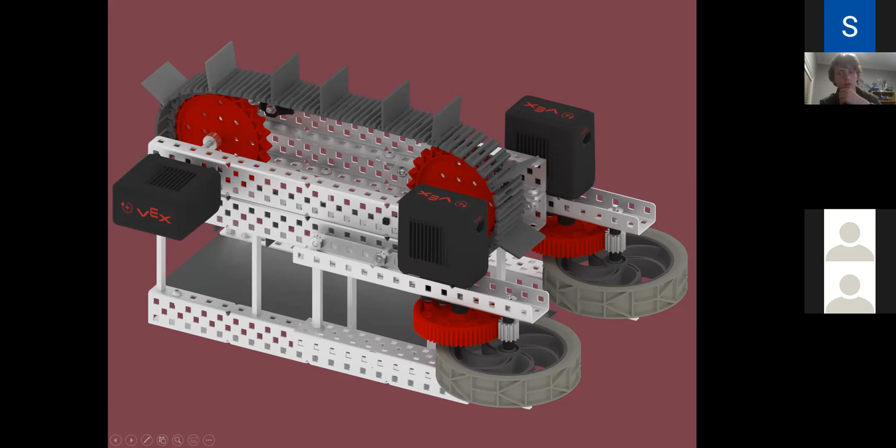Also, like you might have seen at the start, we had polycarb on the bottom of our chassis rails, which would slide better than the metal on the plastic of the platform, so that we would get that momentum to just drag us up without catching. Yeah. Okay. Moving on a little bit.

Now we have flywheels. So there's 2 different kind of flywheel designs we're going to go over: double flywheels and single. So this is a double flywheel. This is a very basic kind of example. This really reminds me, Anthony, of what we had in Nothing But Net, like 5 years ago. We used a double flywheel. Regrettably, I don't think it was the smartest decision.

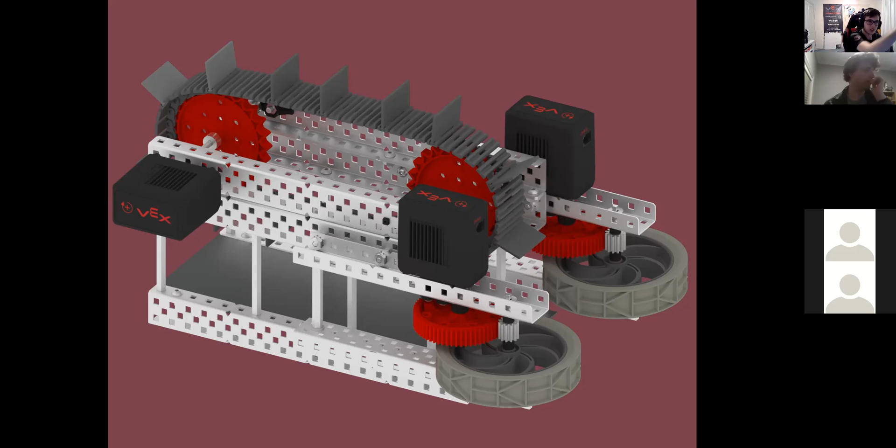Here's a very basic design. So pretty much you have these 2 wheels and you spin them both really, really fast, and then you run a ball through it, and then it kind of gets launched, right? The wheels are spinning, put the ball through, and it shoots it off. It's a general concept. So here's a better image of a double flywheel.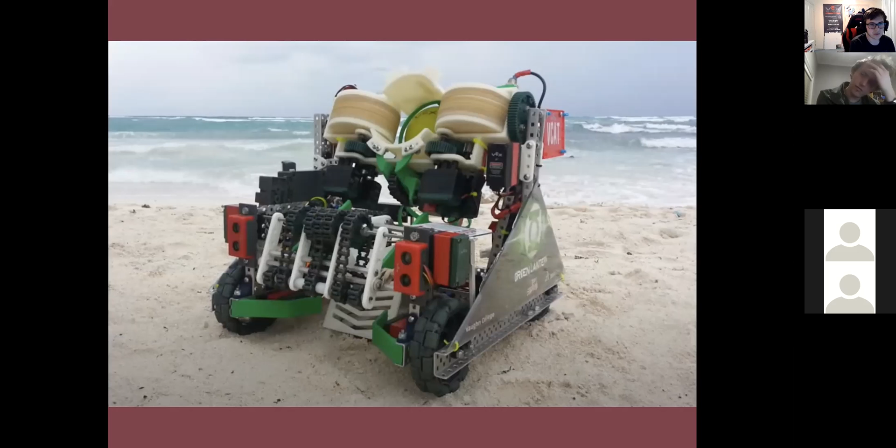So I don't know if any Vex teams do this in Turning Point, Jacob, but maybe from any position, be able to shoot forward and to flags left and right. It's really hard to tune. They found it easier to just turn their robot. Yeah, it is something that is possible. It's not necessarily something that's practical because the tuning is really hard, consistency, stuff like that.

It is a possibility. There's a higher skill cap for double flywheels than single flywheels. And they have less backspin than single flywheels, I'm pretty sure. They are larger and they are heavier though. With that, we then have single flywheels. So here's two robots. We have 1104M on the left, and I think it's 169Y or 169A on the right. And these are both single flywheels.

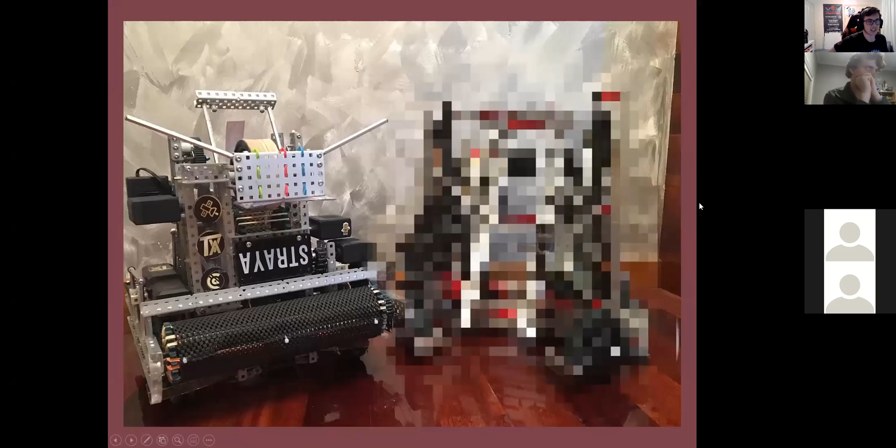So as you can see, they both have like a hood on the back, which the ball rolls against. People use polycarbonate as it has less friction than the metal. And then that kind of rolls through and then shoots it forward. And then here's our single flywheel from Afterworlds. Anthony, did you want to explain anything about our robot?

No, as someone who likes to improve their robots, looking at this just hurts. Yeah, this was arguably at the time our best robot, and since then it's not something we're as proud of now, but at the time it was very good.

Yeah. It was very fond of the floor as well. It was very fond of the floor. Yes, that's right. Hey, wait. I would like to rebuttal. Spence, remember when you drove the robot off the table during the reveal? Yeah, but at that point, our robot had this ability, just because of a miracle of construction. We drove it off the table once, and it hooked on the edge of the table, so it wouldn't fall.

It would go diagonal. So the joke was our robot couldn't fall off tables, yet Anthony somehow managed to drive it off. What can I say? I'm a man of many talents. I remember, Jacob, I think it was you or Lachlan calling me, and he told me what happened, and I was just like, nah. And then I ran back and I see the... I can't remember which one of us called you. We were just talking at the time and saw that. Arguably the best thing that happened that day. It was very funny.

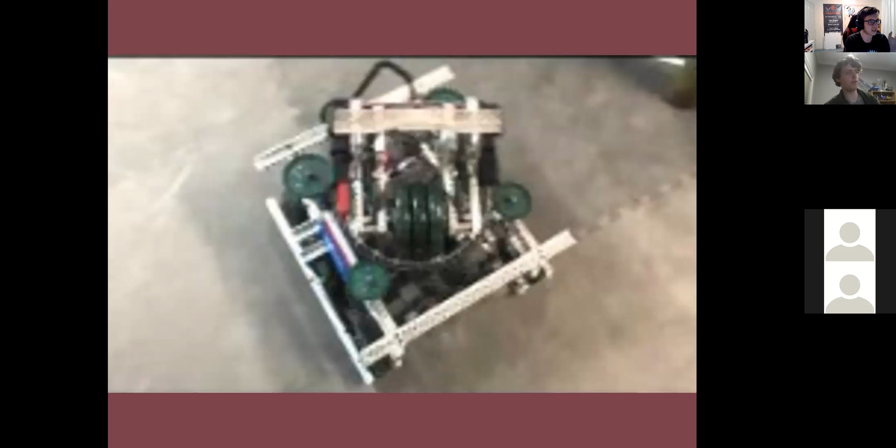Anyway, moving on. I believe Anthony, you sent me this video. This is a single flywheel, and I think you want to show off the turntable mechanism here. We'll mute this one. So what they did was they had their flywheel on a turntable so that they could adjust the angle at which they were shooting without changing the robot's orientation. Is that correct, Anthony? Yes.

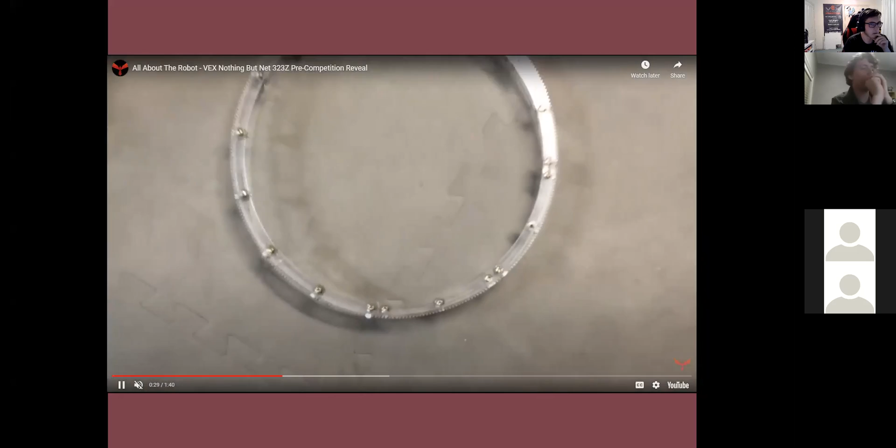They pretty much made a tank. Essentially, yes. Especially if you look at the later reveals, you would see them quite literally cladding this robot in polycarbonate armor. It's a very cool system. As you can see, it has this really intricate turntable system. I'm assuming it fires, right? Yep.

One thing I'll mention about our flywheel that we showed in the last slide, it was also capable of double shot. Although unlike Jacob's where you can just shoot the two, ours was more based on programming rather than the mechanical side. It was based on timing and changing the velocity of the wheel, finding the velocity and then using projectile calculations to figure that out. So there are workarounds if you can't build something in the software, although it's a bit harder to accomplish. You can't do that with a linear puncher, for instance. That's only capable of one. It's a bit more restricted.

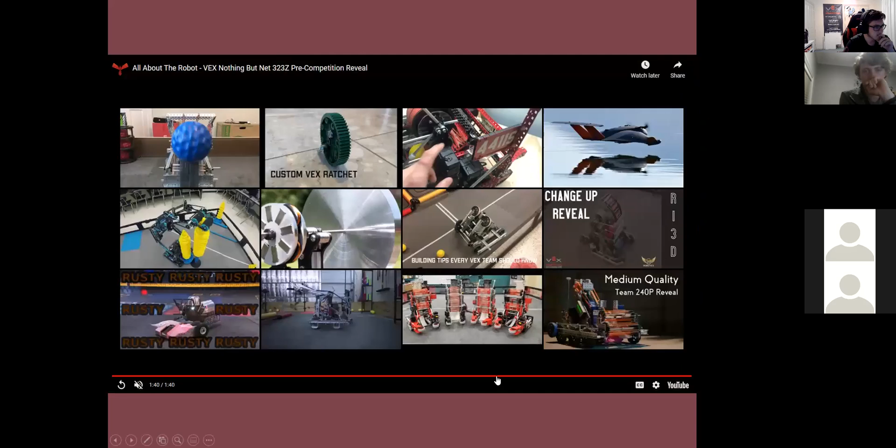There were workarounds, like one of the teams, 240P mentioned earlier, had their arm for flipping the caps also load the balls into their flywheel. They called it a string dexter. But with the catapult, we had one motor rolling our intake up into the catapult, and then the catapult was on one motor. So we were saving a motor over most teams without needing any extra thinking. With the linear puncher, they either had to load the ball into the puncher, fire it, load another one, and drive somewhere else to fire it, or a fair few teams at Worlds dedicated a motor or pneumatics to angling their puncher.

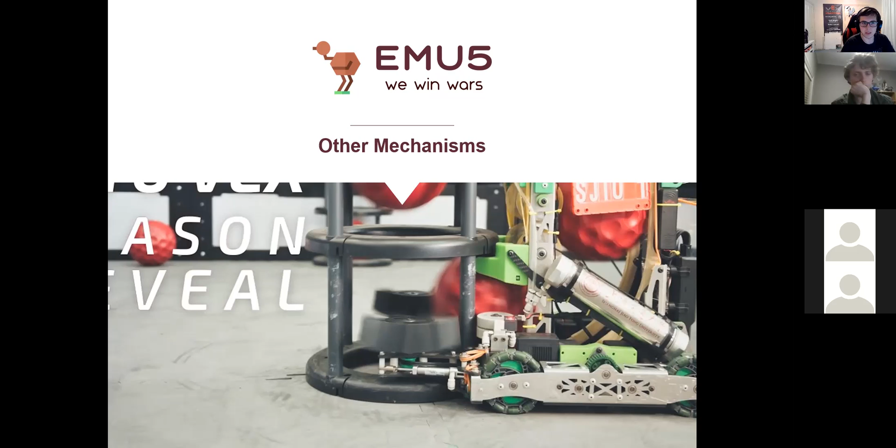Okay, so the first thing up, as we've seen in Jacob's video and a few other robots, there's these rubber band driven intakes, right?

And these are called roller intakes. Now, myself and Anthony, we use this, but we put an anti-slip mat over it. Pretty much it was the meta for almost every single robot in Turning Point, right? Do you guys want to explain why these are so good?

It was just that these rollers were able to conform to these objects very easily, allowing for very quick and easy intaking. And also, since the rubber bands could stretch, it allowed for a large range of area. So you could be very sloppy when you're driving and still collect the balls. But there were still a few other options out there that could allow for a larger area for your driving, but these were the more preferred types compared to the others.

An alternative was using flaps, but a lot of teams would find flaps would knock the balls away. Along with that, it took a lot more flaps to have them be wide enough. So often teams didn't have enough flaps, but they had spare sprockets and enough rubber bands, because rubber bands are cheap like dirt.

And one other cheap alternative that me and Anthony tried: we made a catapult after nationals as a practice robot, and we used zip ties as an intake, which was a bit less conventional. I don't think it worked out as well as we hoped.

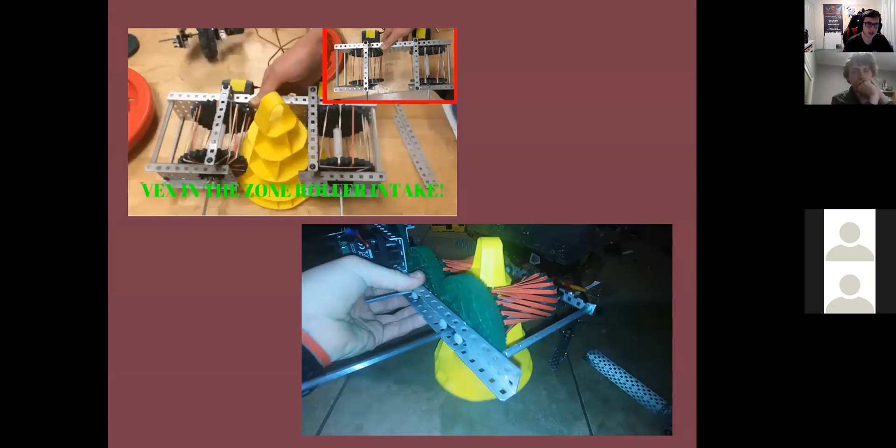Oh, yes, my favorite. Okay, and then a slight adaptation of the roller intakes, the side rollers, which were more common in In the Zone when picking up cones. Jacob, did you want to explain these ones? So, yeah, this is just two rollers linked together, running opposite directions. They just shove the object up into them. A lot of people called those ones Goliaths.

I really didn't like that name, but they could pick up cones quite quickly while relying on a motor, whereas you had alternatives of people who would just clip onto it passively or used a claw. This had more room for error than a claw because you could just touch it with the rubber bands and it would feed it up into it.

Yeah. Whereas there was only one team that ever decided to go for passive and make it work, but no, that's not true. But there was one good team at Worlds, at the top of the world.

Yeah. Okay. Then there's some other variations of side rollers, like what was used in Change Up. Do you guys want to go over this? I don't have much experience in this. I wouldn't know too much. Well, these rollers just run sideways, and you would drive into the ball. And this one has grip mat on it. A lot of them had flaps on them, and they would just feed the balls up, just eat them up from the front as they drove into them.

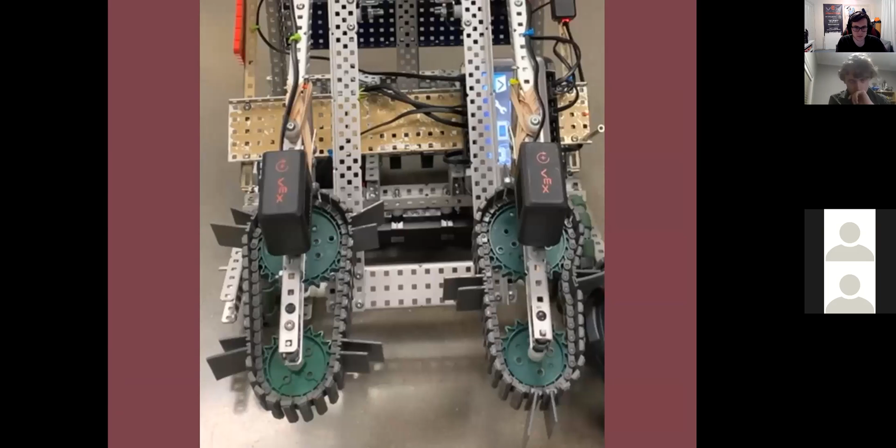Okay. The next one was a bit more apparent in Tower Takeover. Anthony, did you want to go over this one? These intakes were very much the predominant intake method in Tower Takeover, mainly as they were incredibly simple to build and very effective in this game for many teams.

But the main issue, as you can see with all chains, is they did have a tendency to break if you used them in the wrong situations, or someone decided to smack into them hard enough.

Generally people had a roundabout way of preventing these issues by stacking a few more sprockets on the top and bottom, lacing them with another chain to act as pseudo intakes, but they weren't actually intakes. I put tensioners in between the C channel, the roll, and the tread, so there was almost no point where the force of the cubes was pushing against the chain. It was pushing against sprockets instead.

Next intake, this one was seen more in Starstruck - it was kind of just this massive claw that would grab as many things as it could at once, and then chuck them over. It's not as precise, but for that game it was much more efficient because of the shape of the game elements. Whereas in Tower Takeover with this intake, you had square cube elements.

I've got one over there, can't be bothered grabbing it. And then this one with balls. So the intake is kind of all based around the shape of the main game object, so just for this season it was a bit easier.

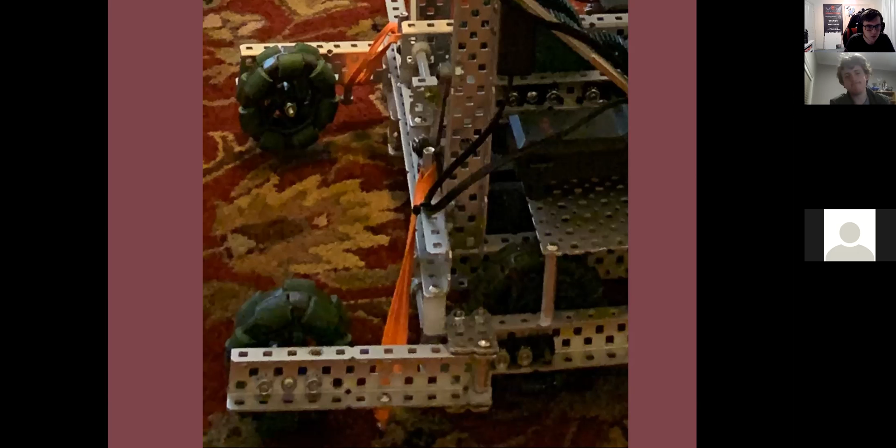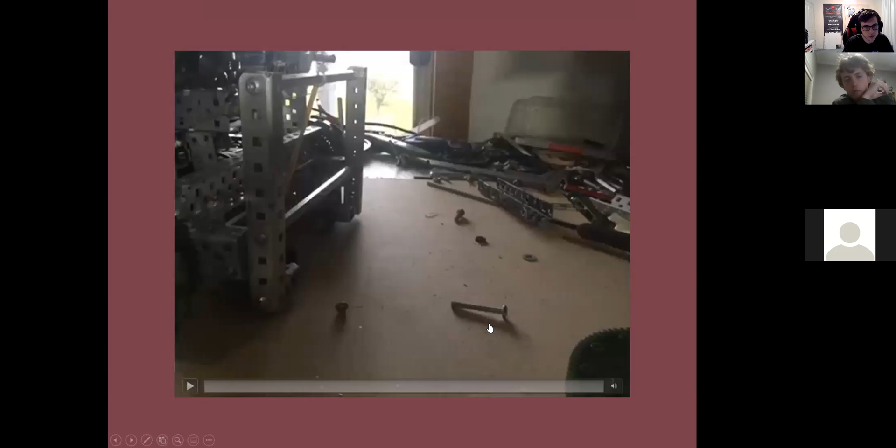Last thing I'm going to go over is wheelie bars. Sometimes with the robot it's unavoidable that it might be a bit too top heavy or the center of balance might be off. So one thing some teams do is extend the robot out a little at the back and add wheels so it shifts the center of mass. We call these anti-tips. Here's a little video of an anti-tip me and Anthony had on our robot during Tower Takeover.

At the start of the game, the robot had to fit within 18 by 18 by 18 inches. What we had was a passive release mechanism, and how that worked is it doesn't require any motors, it just uses another system to work. For us, whenever our tray opened at the start of the match, that would release a little lock which would then flip this out as soon as we started driving. It was attached to our wheels, I think, Anthony - as soon as it moved. Oh, forward - no, that was originally our first design, but then at the end we changed it to the tray.

Yes, mine was powered by gravity. So when I drove forward, the force of moving forward meant it would want to stay where it was, so it would move backwards and then fall down from gravity. There's a lot of different systems you can do. This is another video of ours from the bottom - as you can see, we have this little bar that moves out and then flips it out.

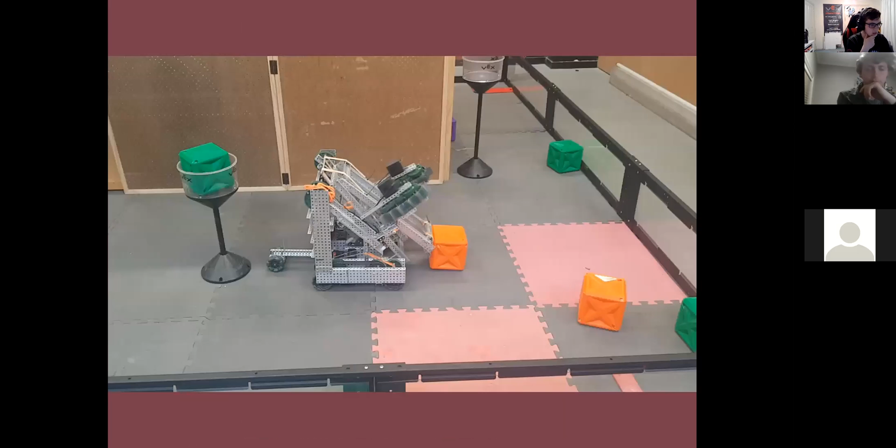No, back to the video before - sorry, this first one, or yeah, this one. Every time I showed this to people who asked if they wanted to build it, I always encourage them not to, as this is an incredibly time-consuming way to solve a very simple problem. Over-engineered, yes, incredibly - but it worked, you can't deny that. That's why I always steer teams toward a method like Jacob's or anyone else's, which was much simpler. I don't know whether I'd call mine simple. All right, so that one there was simple - not the one on mine.

Let's look at this video. Okay, so this was also a passive release mechanism, and this was your tray deploy mechanism, I'm pretty sure. Did you want to explain what's happening here?

So if you have a look, we had those side rollers for picking up the cubes, and at the start of the match, to fit into size, they were angled upwards. We needed this tray to also fit in size, so it was rubber banded up but pulled down, and those two rollers held it in place. Then by running the rollers outwards, as if spitting out the cube, it spits out the tray, and the rubber bands flipped it back up into its final position.

So there was no motor dedicated to flipping that out. It's all rubber band powered, from the actuation of those rollers. So we were reusing a part of our robot that already existed to do one thing.